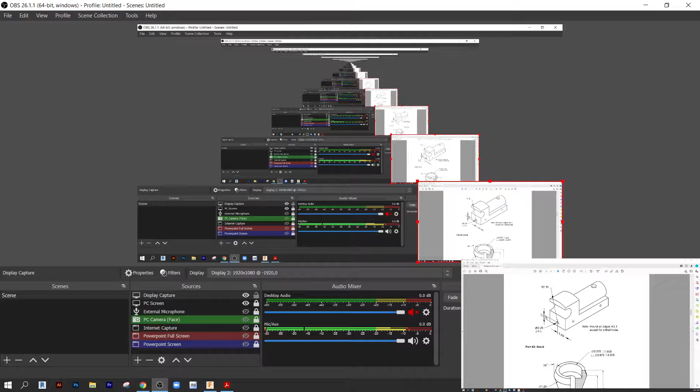Alright guys, in this video today I'm going to be modeling the train body for the first part of our miniature train project. Now, this can be difficult. I'm going to try and go quickly on YouTube so this video isn't 20 minutes long. But as you can see here, there's a ton of different dimensions that we need to be following.

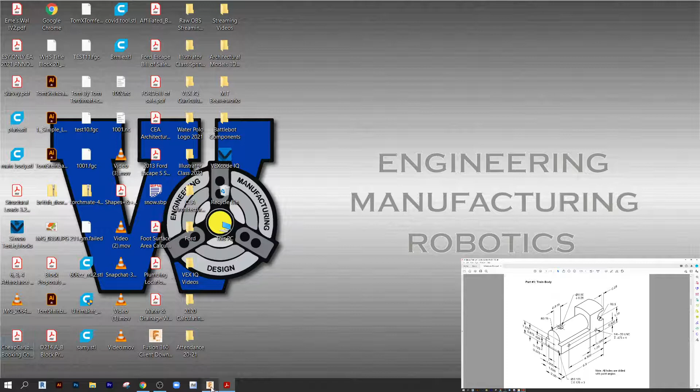But let's get going on this thing. Remember, the purpose of this project is not to make you an expert modeler. It's to get you used to reading dimensions and making decisions in your head about how this thing will look in 3 dimensions.

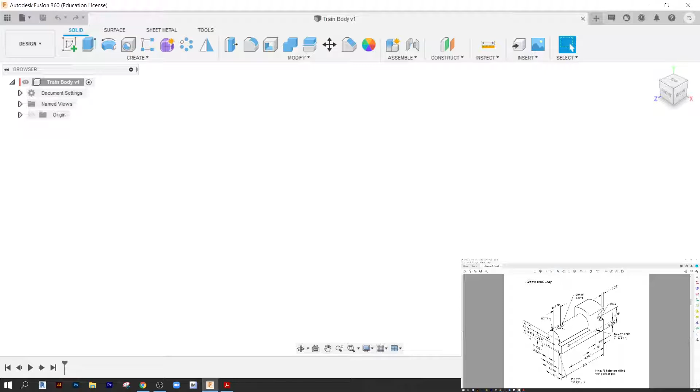So here we go. One of the things to remember is that in this train body blueprint, there are 2 different views. There's this front view of the object, and there is the view down here on the second page, which is the back view. This is critical. Some people forget to look on the second page and they think, oh, all the dimensions aren't here. They are.

This is essentially like a Sudoku puzzle where all the dimensions to build this are here. You just have to find them, and some are missing, but you can solve them with all the numbers that are there. Kind of like a Sudoku where you're figuring out 1 through 9 in your squares. All the information is here, we just have to figure it out together.

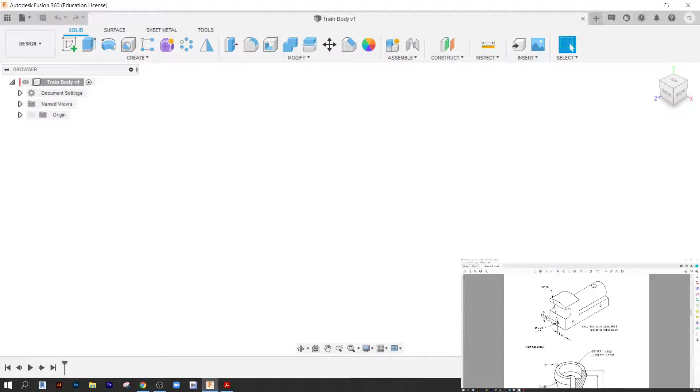So here we go. Like I said, if I go too fast, feel free to slow me down, and we'll go from there. The first thing I want to do is make this major train body with this rectangle and the arc across it. To do that, I'm going to need to make this 2-dimensional piece and extrude it the length of the train. So let's do that here.

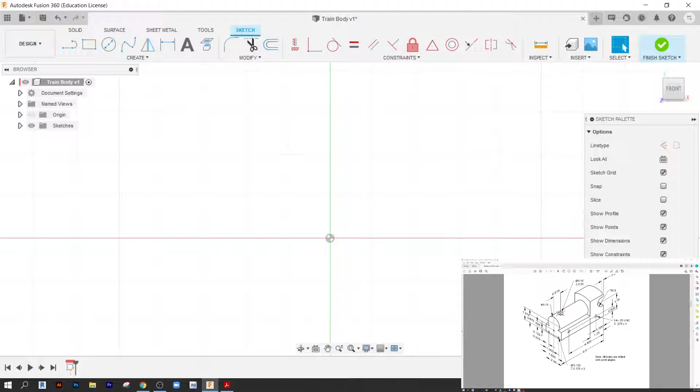The top view shows me how wide the train is. So it looks like it's 2 inches wide, and I think that's all we need for right now. So let's make a rectangle. I'm going to hit tab, 2 inches wide. I'm going to make it 4 inches tall because I don't know how tall it is yet, and we're going to trim. So now I'm going to be looking at this arc system.

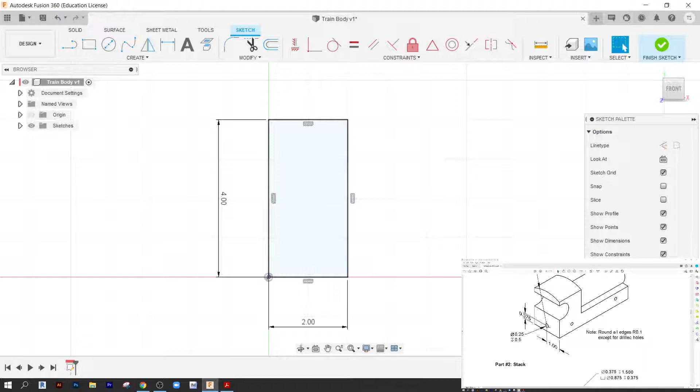Now, the arc will tell me the height of this whole back body piece, but remember, there's no dimension that says exactly what the height is unless we do a little bit of math. So here's what I'm referencing. There's a hole in the back where the center point of the hole is 0.375. The hole is centered, so I'm going to put that on this drawing, even though I'm not necessarily using it yet.

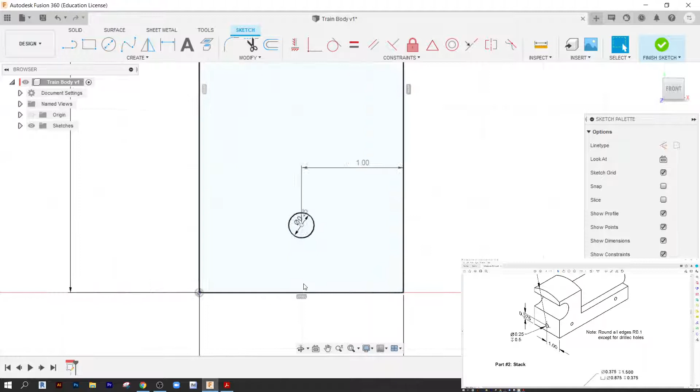I'm going to make this hole 0.375. I'm going to hit D for dimension and dimension this so it's 1 inch off the side. And it looks like, sorry, the hole's not 0.375, the hole should be 0.25. It looks like the hole is, D for dimension, 0.375 off the bottom.

It's a 0.25 hole. Now, if we look at our print here, in order to tell how tall this back of the train is, we can use this radius of the arc here. Imagine this arc as a big circle. Right now, it's giving us the radius of this big circle. So let me show you a cool trick here.

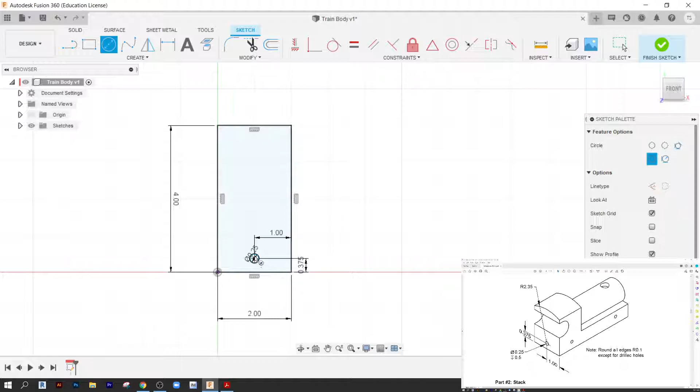Instead of trying to draw the arc on Fusion, what you can do is draw the circle, and instead of using the radius here, we're going to use the diameter, which is 2 times the radius. So if we do 2.35 times 2, using the little asterisk star button, and hit enter, this is going to give me this big circle, but this is the right size of the arc. This matches our print right here.

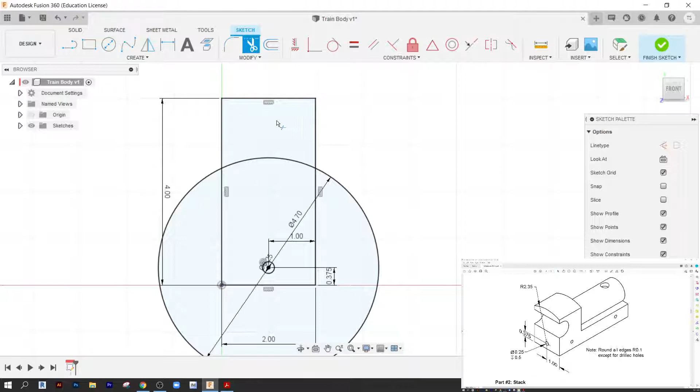So watch what I can do now. I can use the scissors button up here, trim, or the hotkey is T, but I'm just going to click on it. And I can start trimming away all of these extra lines, so I'm only left with this little back piece right there. It's okay if it gives me an error. Finish sketch. Okay, and I'm not going to worry about this hole right now.

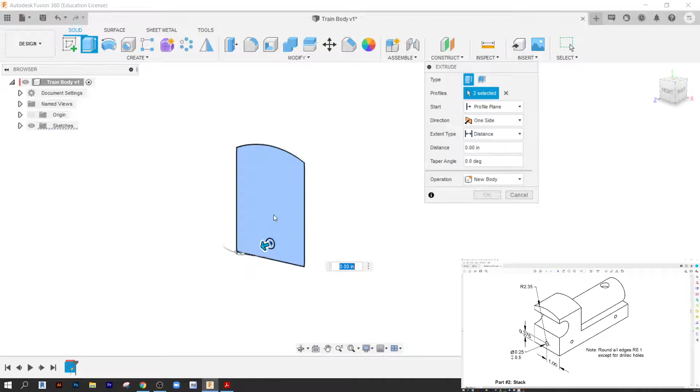I'm going to click on extrude. I'm going to click on this object and the circle. I'm just going to make it solid, and I need to figure out how far I need to extrude. It looks like the length is 5.5. So I'm going to type in 5.5 inches, and hit enter.

Now we have this main body here, but I want to work on this front circle. I'm going to draw this circle here. The rectangle is kind of already drawn. And then I'm going to remove material to get this little cutout.

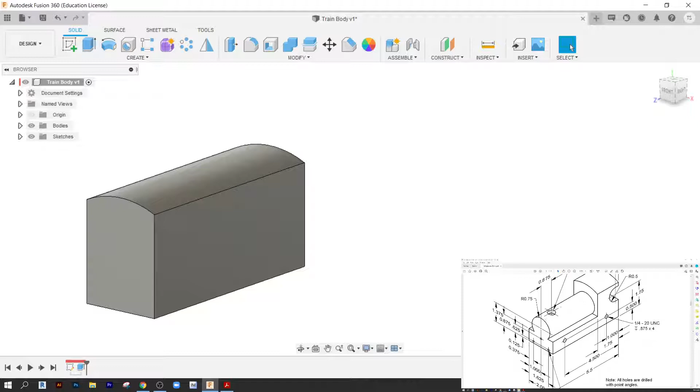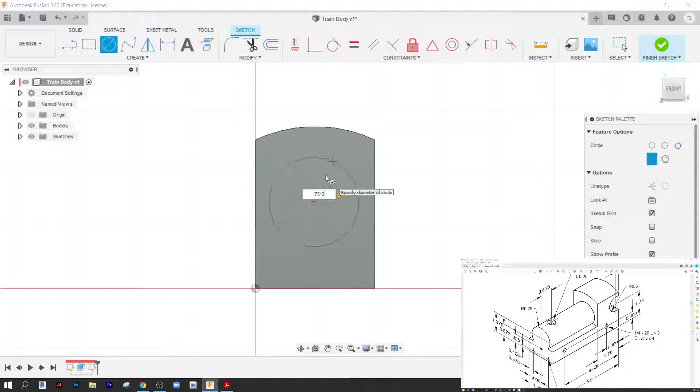To do that, I'm going to put a new sketch right on the front. I'm going to draw this circle, which happens to be a circle with a radius of 0.75. Remember, in Fusion, when we draw circles, we always have to use diameter. So if our radius is 0.75, we need to multiply times 2, or you can just do it in your head. 0.75 times 2 is 1.5.

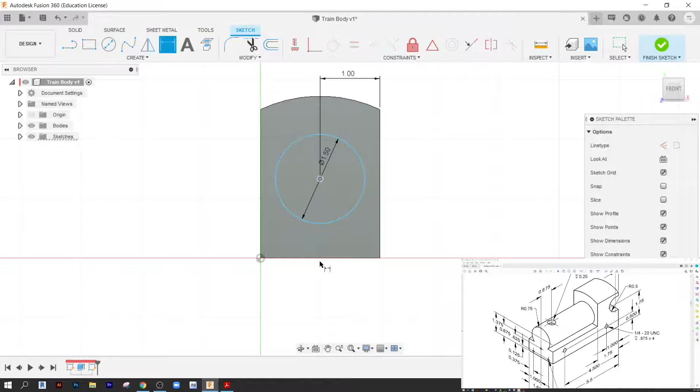Now we have to dimension this from the bottom and from the side. I know that this center of the circle is right in the middle, so because our train width was 2, it needs to be 1. And from the bottom here, let's see what the dimension needs to be. If I'm reading my print and I zoom in, I look at these extension lines right here from the center of the circle. It says that between these arrows, from the top and bottom of the train, is 1.375. Now that circle is dimensioned.

Now let's draw - I know I said we already drew this - I want to draw this little rectangle down here to help us frame out the front of this train. So I'm going to click on a rectangle, click on the bottom of this, and I can eyeball it a little bit before I add dimensions in. It's going to be the entire width of the train.

And how tall does that thing need to go up? Let's look here. The top of this little rectangle looks to be, let's look for the right arrow here. Aha, right here, 0.875 tall. So I automatically clicked out of this rectangle feature. To dimension it, I can click on D on my keyboard for dimension. Click on the top, click on the bottom, and type

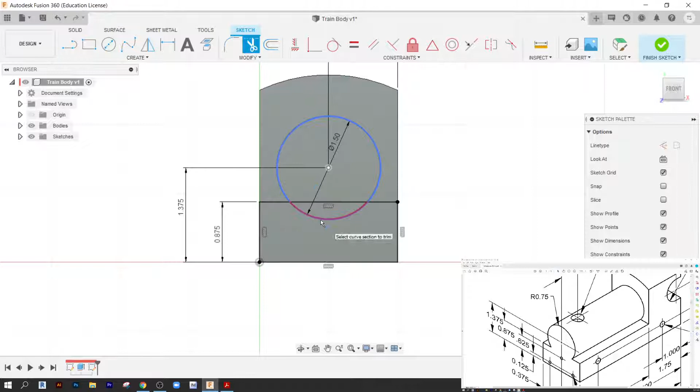0.875, enter. Now I'm going to trim with the scissors tool, or the hotkey of T. I'm going to trim this up right there, that up right there, and now I want to extrude all of this area back. So let's spin this around so we can see.

So how far back do I need to cut this? Well, let's look, here's where we need to do a little bit of math. If this entire train is 5.5 long, and it looks like - let's see if we can see, I can't find the other dimension to show me how deep this extrusion is - but I do know the dimension from here to the back. So from here to the back is 1.75.

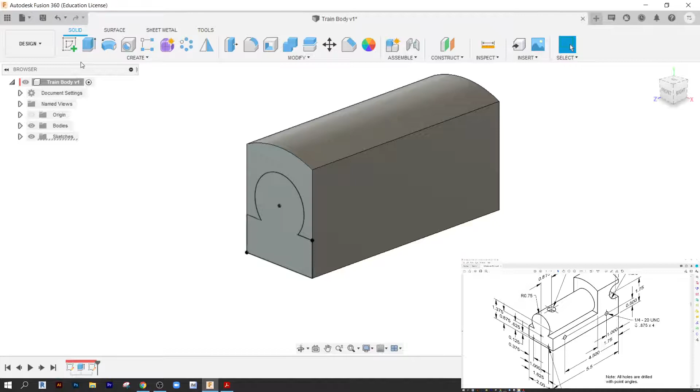So if I do 5.5 minus 1.75, that'll give me my extrusion. So let's do that on here. Now you can do that in your head, or you can click and have it do the math for you. 5.5 minus 1 is 4.5, minus 0.75 is 3.75, which is how much we want to extrude.

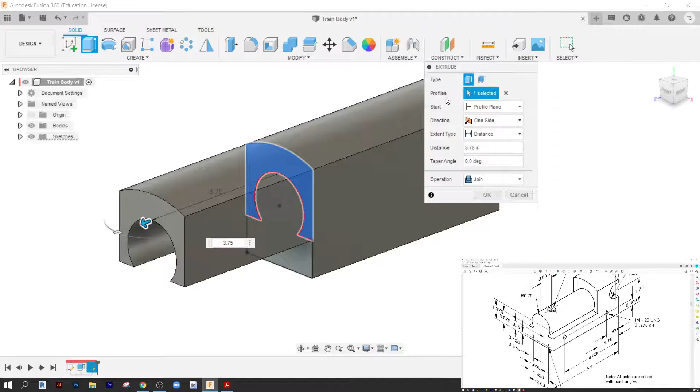Now if it does this on you, change your operation to cut and it'll flip it. It should, and if it doesn't, grab the arrow. We want it to be, at least in my example, minus 3.75. And then hit OK. Look at that - we have a train body starting to come together.

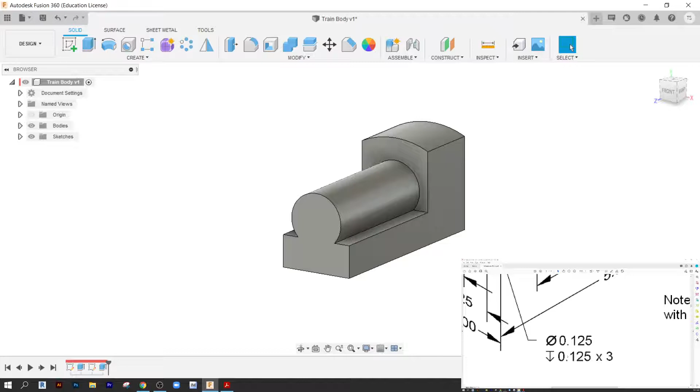Now the next thing that we need to do, let's do some easier things here. Let's do the holes in the front of the face. So there's 3 holes there. Now the information for the holes can be found right here. The circle with the line going through it means the diameter of the hole. The arrow going down means the depth of the hole. And this times 3 means that there are 3 of them. So all of this information is the same for each hole.

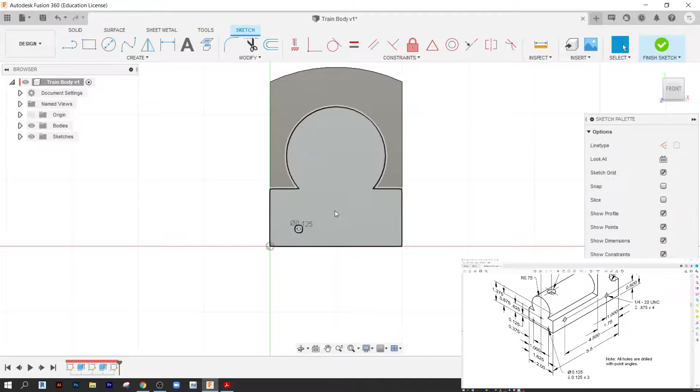So let's put a new sketch right on the front. And I like to just first draw the holes - I don't care about their location yet. I know that they're 0.125 in diameter. So circle, and another one over here, 0.125.

Now the locations of these right now are not exact. I'm going to move them. But the diameters are correct. So let's look at our information here.

Let's start with these bottom holes. So if I look on the up and down direction, how high they are off the bottom, it looks like - here's the line - they're both 0.125 from the bottom, and 0.375 from the left and right side.

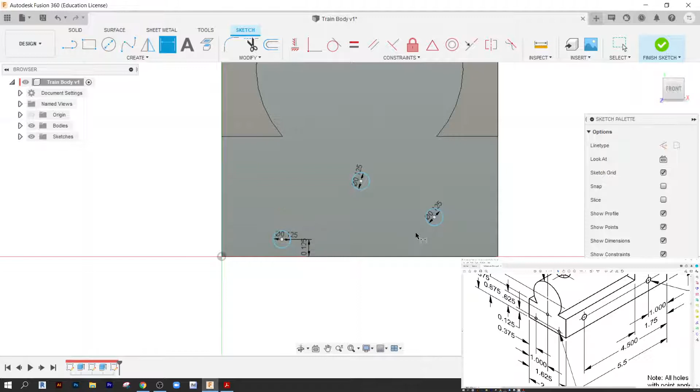So let's go dimension, click on the hole. This should be 0.125. Yeah, same with this one, 0.125. And then from the side, it's 0.375, and this one is 0.375. You know that the dimensions are all good when your object turns black, so you can see the difference. This one's still blue, meaning we still have to add some dimensions to it.

So this one we know is centered, so the center point is 1 inch - we've done that before. And from the height, it looks like it's 0.625. So let's do that.

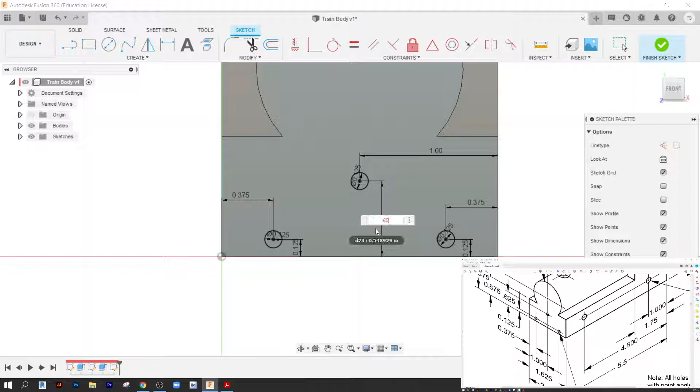All of these are black. Finish sketch, and let's see how deep they need to be. I know I said this already, but 0.125. So let's go to extrude. We need to click on each hole, and let's change this to operation cut.

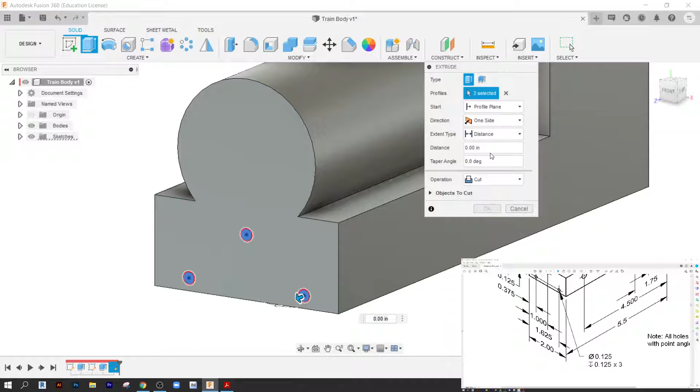0.125. Now always look at it beforehand. Look, it says you're trying to cut, but there's nothing to cut. That's because we need the arrow to go the other way. Sometimes that's a pain in the butt, but that's okay. Hit OK.

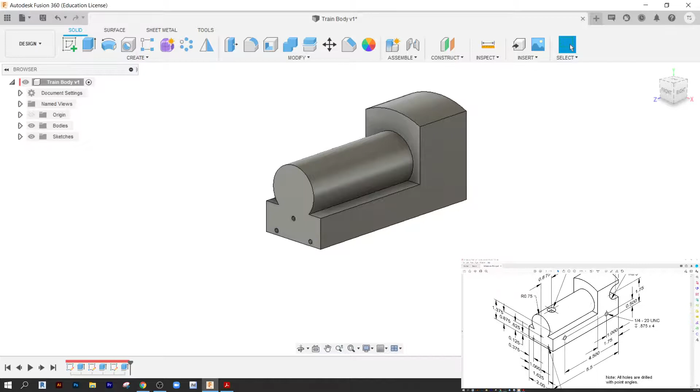Now we have these 3 holes. Life is looking good, we're getting closer to being done. Let's do these side holes here, these 2 holes down here.

It's the same operation: create sketch, sketch on the side. The hole diameter is—I know this can be confusing—these happen to be threaded holes, but for now let's just look at this number. These are 1/4 inch holes, meaning they're 0.25 in diameter.

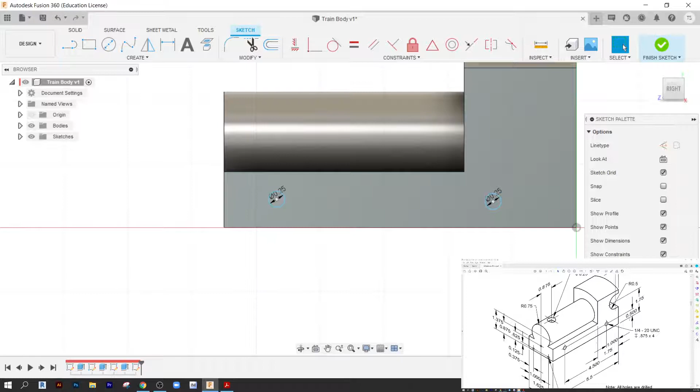So let's draw 2 holes that are 0.25. Let's draw another one over here, 0.25, and let's dimension them from the bottom. From the bottom, it looks like they are 0.5 each.

So click on your circle, click on the ground. I hit escape there because I don't know what that was. I'm going to try it again. Here to here, 0.5. Here to here, 0.5.

And then let's look at the distance from the sides here. This back hole needs to be 1 inch away from the back, so from here to here is 1 inch. And then what about this one? This one needs to be 4.5 inches from the back of the train.

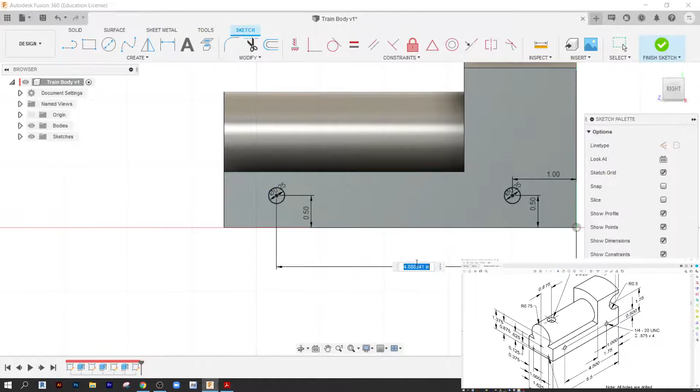4.5, enter. Both of our holes are black, they are good to go. Let's click on Finish Sketch, and let's do some extrusions.

Click on Extrude, click on both of these holes, and they need to be 0.875 deep. Now it says 0.875 times 4. It's because there's 2 other holes on the other side in the same locations, but I'm going to show you a trick to do those. Let's first cut these to minus 0.875.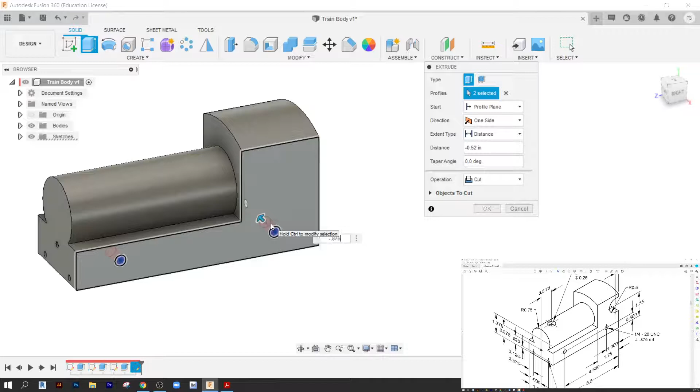Okay, now here's a cool trick. If I don't want to remodel these, I can do what's called mirroring, which means if I put a sketch plane right in the center of this train, I can have it copy these extrusions and flip them over right to this side for me. We're going to be using this a lot in this class, so watch how you do this.

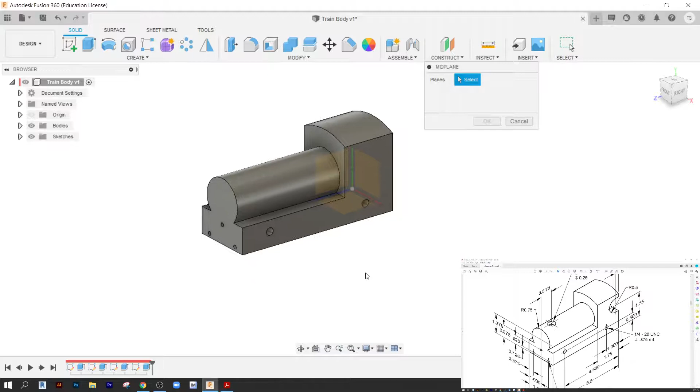If you go up to the Construct button and drop it down, there's a button that says midplane. So what we need to do now is click 2 flat surfaces that are parallel—there, we want our midplane to go in between. I'm going to click on this surface, spin over and click on this surface, and watch what happens. Boom. I'm going to hit OK. It just put this weird plane through the middle.

And a new folder came up over here that says construction, because a plane is a construction component. So now watch this thing.

Up at the top, we're going to find a button that says mirror. It looks like a triangle. You may have to drop down the Create tab to find it. Mirror, then it says type. We want to do—let's go

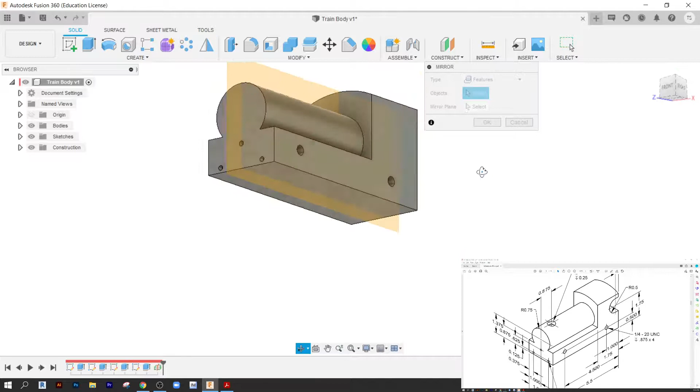bodies. Let's select—no, let's try features. Yeah, is it features? Let's see. Maybe it's faces, yeah let's try that. Type faces. Let's click on this face. Click on this face. Sorry, that one didn't work. No, there's two.

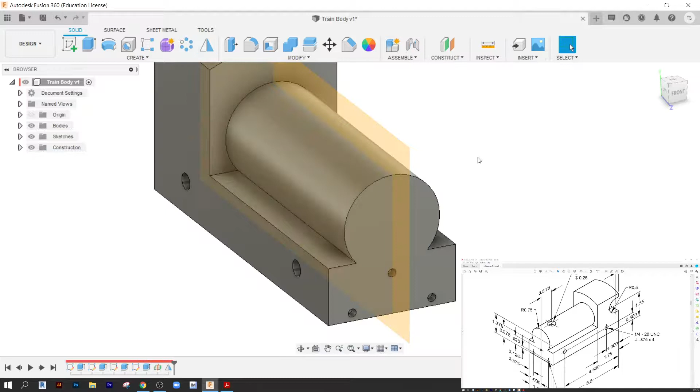Then mirror plane—we want it to flip around this thing. Notice what it did. I didn't hit OK yet, but it's going to put them on that side, I hope. Hit OK. Boom, there they go. So look, it just did all that work for us.

Now I don't want to look at this plane anymore, I'm not using it. So what I'm going to do is just click on the eyeball next to construction, and it'll go away—it's just hidden. I'm going to hit save, Control S, or you can hit the save button. I'm going to keep going.

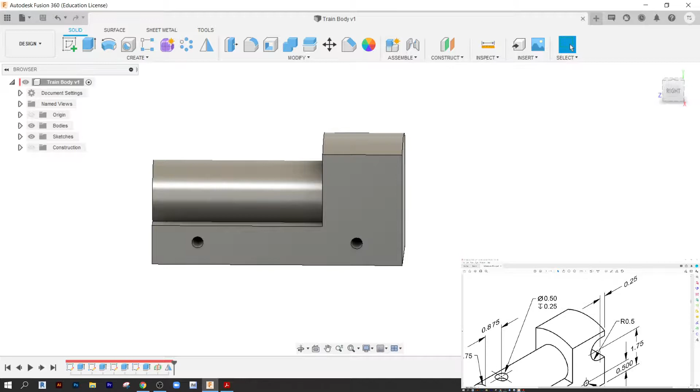We're almost done. Now we're going to put this little circle in the back of the train body. So let's put this circle right here. Let's see if I can zoom in. Yeah, so I'm going to put a new sketch right on the side, and I'm going to first draw my circle anywhere. That circle has a radius of 0.5, so a diameter of 1.

Enter. It looks like the circle center is 0.25 from the right side of the train. So dimension, click on the circle, click on the side, 0.25. Enter.

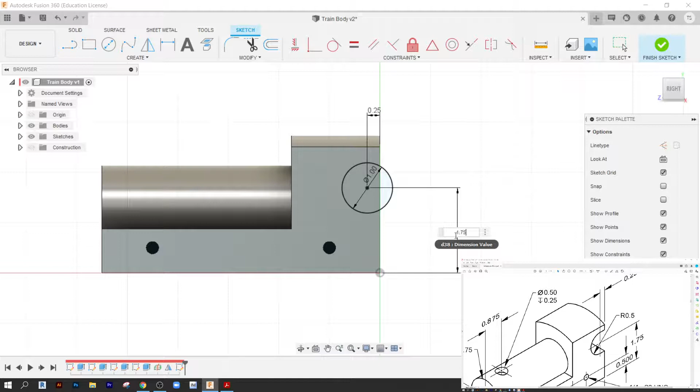Now notice the center of the circle is 1.75 from the bottom of the train. So dimension D, click on the circle, click on the bottom, click over here, 1.75. Enter. Now here's what I want you to notice—this is a common mistake that a lot of my students make when doing this thing.

This hole at the end is not curved, it's straight. We call that tangent. So if you look at this print, this part is straight across. I'm going to draw a line that goes from here to the end, just like that. That's a tangent, and I think that's a straight line. If we want to make sure this is straight, I'm going to do the same thing down here. Click here—yeah, this is not a straight line.

To fix this and make this horizontal—using bad vocabulary—I'm going to click on this horizontal button. This is a new thing we're trying. I'm going to click it, and notice it's black.

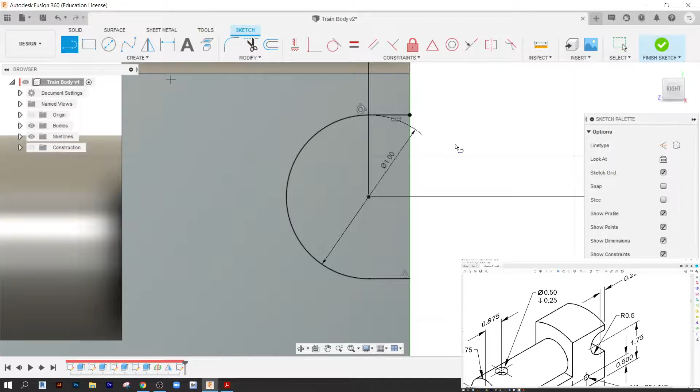Life is good. I'm going to trim up this circle because I like to do that, and trim this and this one. Just for giggles, I'm going to close this piece of geometry to make sure it extrudes. Finish sketch—it's all black, so that's good, nothing's blue. Extrude, and this cuts all the way through, so I don't even need to give it a dimension. I just like to go all the way through. Hit OK. Boom, we're getting there.

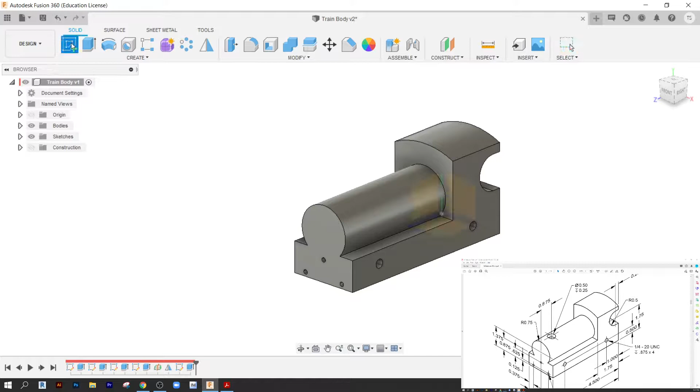Almost done. The last part is the most complicated, but I'm going to show you a cool trick. The last part is the hole for this train stack. To do this hole, we need to put a sketch on this rounded part of the train body. So look, if I click on sketch and try to click—whoops, undo—it doesn't let me select this curved face or this one. You only are allowed to draw a sketch on a flat object or plane.

So watch what I'm going to do instead. Now, you haven't done this before, so it's okay if this is tough. We need to make a new plane, kind of like we did before. Very important—we told our file to hide all planes, remember, because we hid that middle one? So let's bring it back.

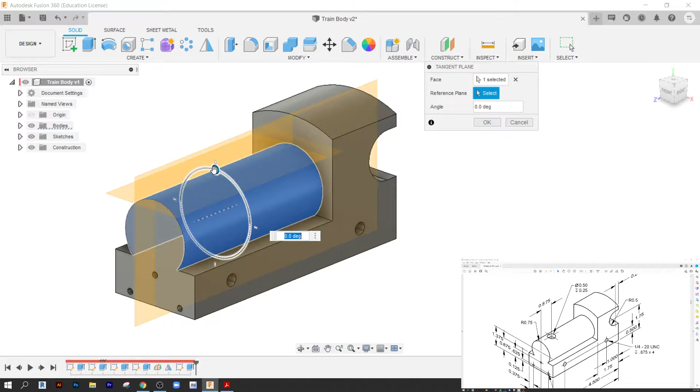This time, we want a plane going right on top of this. So let's go to construct, and this time we're going to do a tangent plane right here. Watch this. Click on tangent plane, click on the face we want, and look, it already drew it for us. Now you can rotate it if you want to, but don't—we're going to keep it at 0 degrees. We're going to click OK, and now I have a flat surface right on top of there to draw.

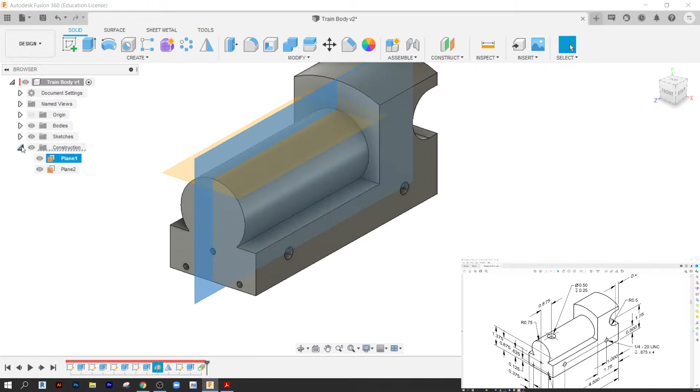Now it's really confusing because I have this bisecting one as well. So what you can do is hide that one plane individually because I don't want to look at it anymore. That bisecting plane—if I open the construction folder it's plane 1, I think—I'm just going to turn off that one. There we go. So now I'm going to put a new sketch on this plane.

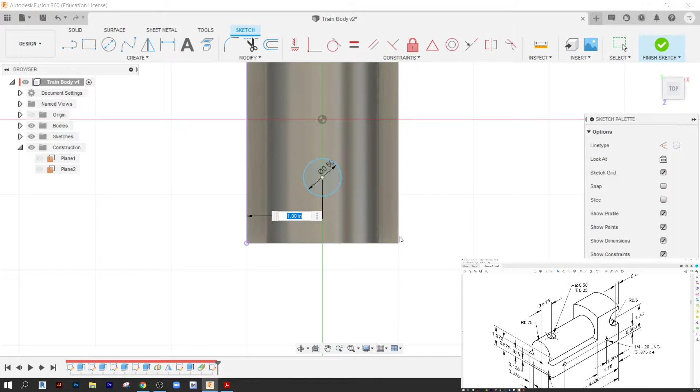Just like we did before, and I'm going to draw a circle. That diameter of that hole needs to be 0.5. It is centered, okay, so I'm going to center this thing and make it 1 inch from the side. And it looks like from the front, it's 0.875.

Again, you may have to—oh, look at that, it was perfect position. So it's nice, it's black lines. You may have to go a little bit slower, and you may have to repeat that section. Hit Finish Sketch. And if I flip this around, you can kind of see what we did—we drew that right on that little plane.

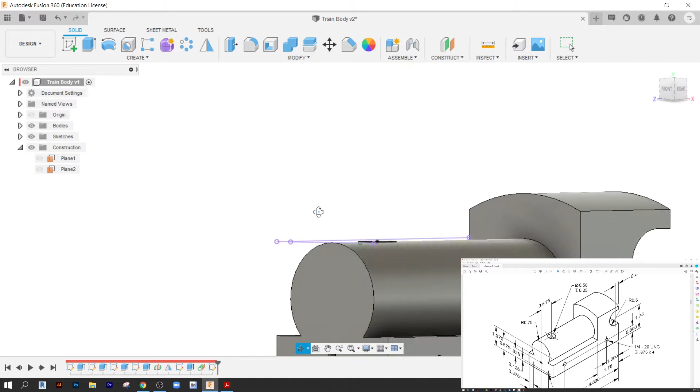Let's extrude. I know we have these weird pink lines, that's fine. We're going to cut, and it looks like that goes down 0.25. Now again, look, it wants to come up—we don't want that, we want it to go down, so minus 0.25. Hit OK, and right there is our finished part.

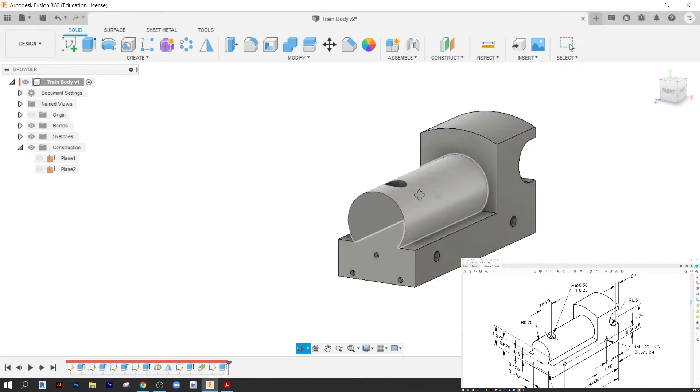Oh, we have one more thing to do. These holes in the side are supposed to be threaded like a bolt. So this is really easy—to add threads, we're going to click the Create button, find the Thread button, and Fusion's pretty smart, it knows what size these are. So I'm just going to click the inside of these holes.

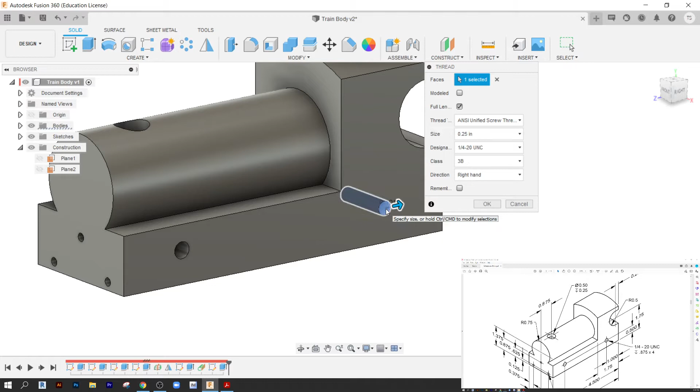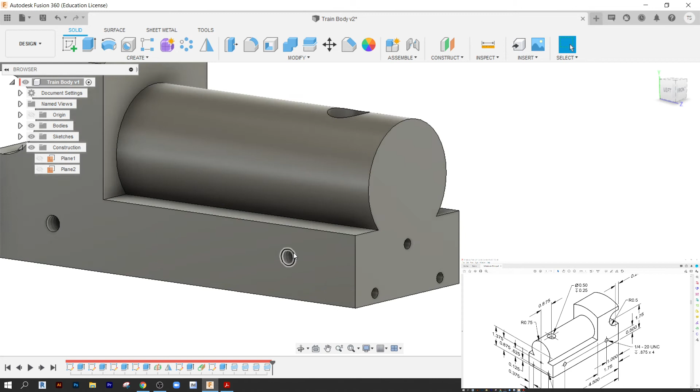I'm going to click on—I wonder if I can click multiple. Oh no, I don't want to do that. Let's try that again. Create thread. Okay, let's do that. So let's go this one, hit OK. Let's do the same thing—thread, this one, hit OK. Let's create this one, hit OK. There is a way for you guys to do this over and over again, but it wasn't working for me. Hit OK. So now, when you zoom in, those things are completely threaded.

This is a good point. Hit save, and right there, you have finished the train body. Good work.